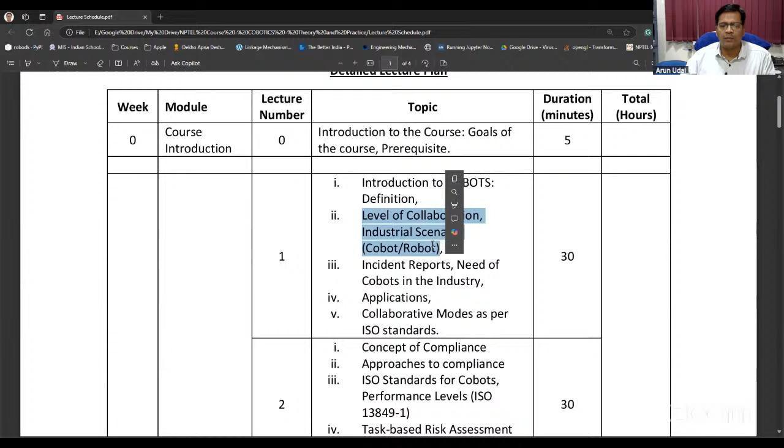So we have covered this. I introduced you to cobots, what exactly they are. You must have found some similarity with the type of robots that you have seen in quite a lot of places. Even humanoids, their arms are like cobots, their legs are cobots, right? So even the legs are arms. In general robots, they are also arms. So they are body appendages.

I showed you quite a few incident reports which stress the need for cobots in the industry, because you saw there are a lot of accidents even in India. I have shared some news reporting from India also. You saw a huge number of applications which normal industrial robots cannot do, which can be done by cobots, especially AI adaptive robots.

Collaborative modes I have explained as per ISO standard, how they look. I discussed quite a lot of industrial standards which should be looked at when you buy or use any cobot especially. There are standards like ISO 9283 which were standard for industrial robots. But when you deal with cobots, there are many other industrial standards which should be considered when you take up any cobot.

Why? Because industry is flooded with cobot markets, and looking at that, quite a lot of fake cobots are also there. So be very careful while you use one of them in your lab, because that makes you potentially very unsafe. Your students may get injured, and it is very dangerous. We are dealing with students, so it is very important to take care of them. If it is a cobot, it has to be a cobot. It cannot be just a claimed cobot.

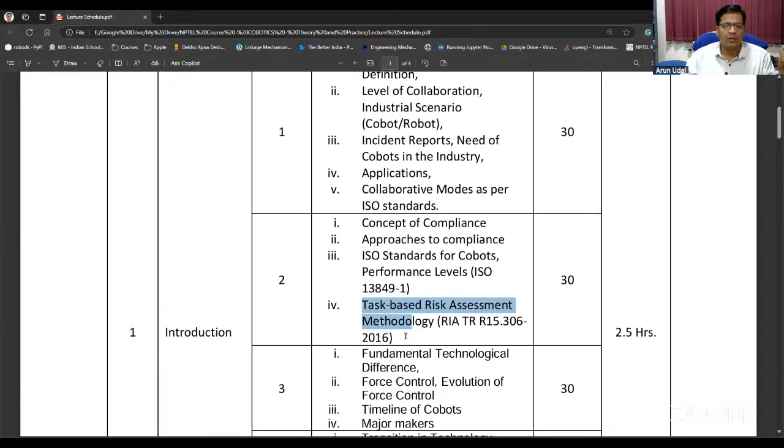I have covered task-based risk assessment methodology in the first week itself. That is how industry people should be aware of how risk assessment is done for any machine in general. But yes, for cobots and robots in place also, you can do it. Okay, standard performance levels. That is, if it is applied with medical or entertainment or any kind of industry, how you should take care. What is the concept of compliance you have discussed?

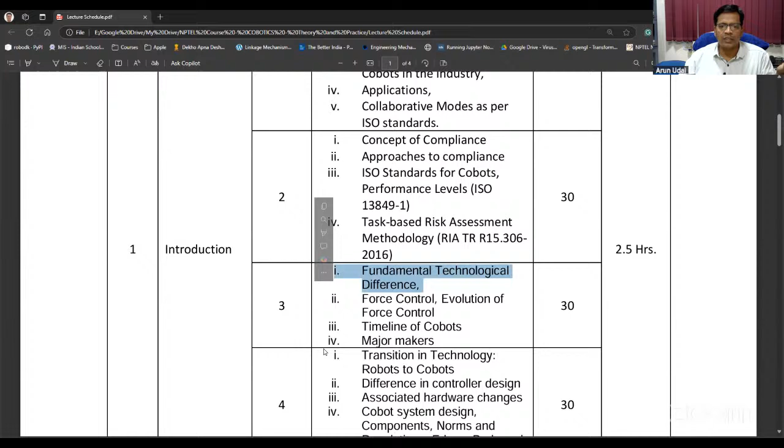Okay, so yes, and fundamental technological difference. What is a robot? What is a cobot? You have appeared for your quiz already, weekly assignments. Hope these are quite okay with you. You have digested well, looking at the performance and all.

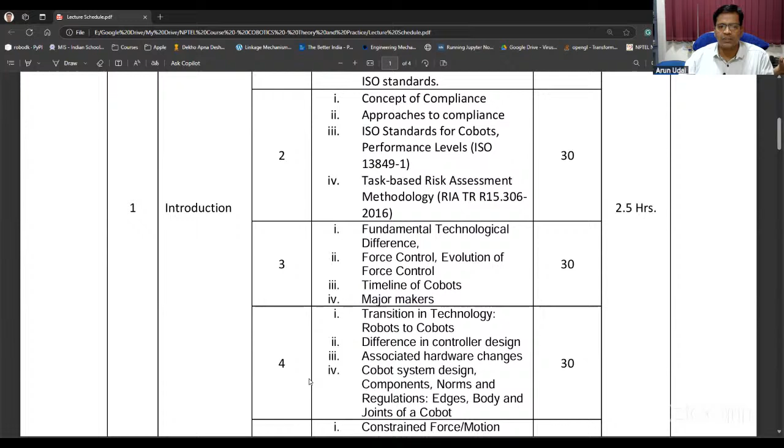Force control, how it has evolved, how we have reached till cobots, who are the major makers. I have discussed on various parameters. So these are few enlightenments which should be there when you deal with cobots. How technology transition has happened, difference between controller design. Controller itself is quite different. Okay, you have to deal with joint torque control. Earlier it was position control. Now you know already. Associated hardware changes, why the cost goes so high.

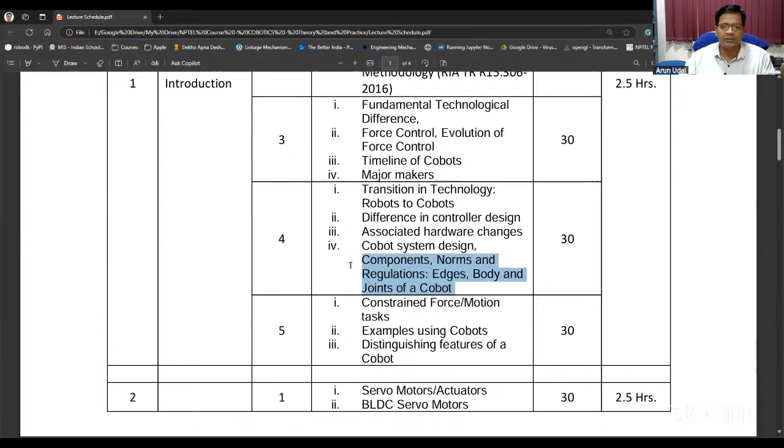Okay, cobot system design, what are the components, edges, body, what are the regulations which are there. So these things were covered in week 1 itself, which has enlightened you to a quite high level that you can at least now distinguish between a cobot and a robot, industrial robot. Constrained force/motion tasks, it is not covered in quite a lot of textbooks also, but I have attempted to cover it to make it very clear how robots should be applied for a particular application.

So this course as a whole is a vision of myself. When I started my PhD in 2010, the cobot already started taking up the place. So 2010 to 2025 now. So many years passed by, and we are still doing too much of fundamentals, and still no courses are there, and very few books are there, and mostly are in research. Not even a single textbook is there. So you see, the course justifies itself by such need.

It was 10 years before me also. Even Oussama Khatib and all, they started almost 20-30 years back, they started publishing in cobots. So you saw through the timeline of cobots, it's a history now, but still it is not very popular. But now it has come up because of its popularity in humanoid robots and quadruped robots at least. Now it is taking up industrial spaces, but there is a lack of literacy, kind of. Not just in India, it is abroad also.

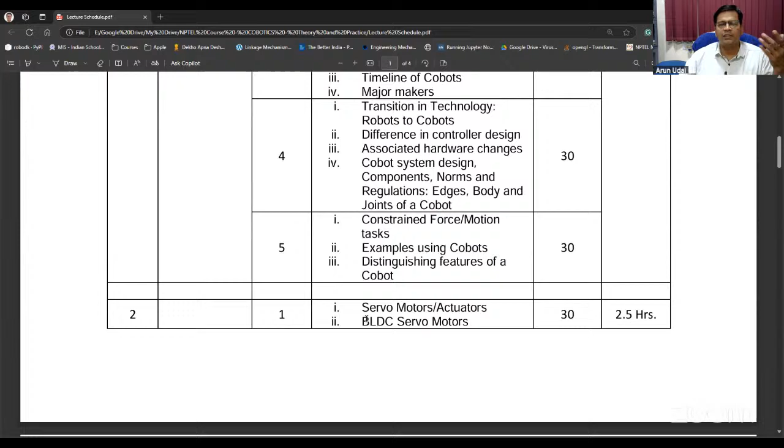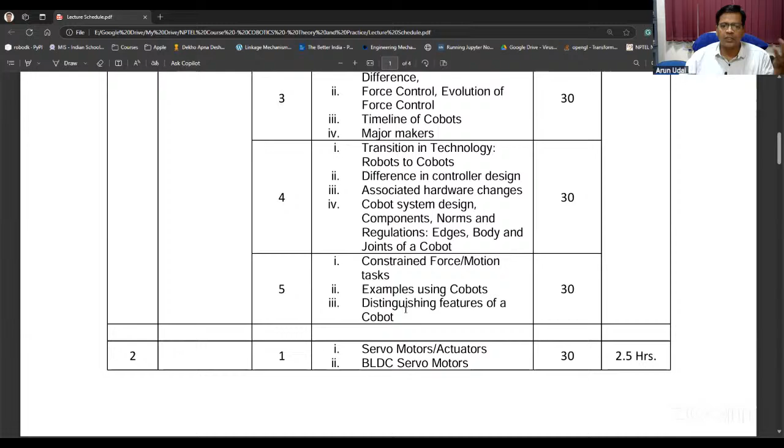Very few institutes are covering this because it is mostly too much of research that went in, which has actually made this standard robot a cobot. So that is the reason it was covered to this detail in the introduction itself. So the introduction itself will make you aware of the importance of this course. Okay, so second week you learnt about actuators.

I have covered actuators even in my other NPTEL course, that is on industrial robots, theories for implementation. That is normally run in the June session of the NPTEL SWAYAM portal. That one was different, and this is a little different in the way I have covered the BLDC motor much more in detail, and the kind of motor drives, especially those which can do torque control. I have covered them in very much detail. Harmonic drives I have covered. That is special to cobots only.

Although quite a lot of contents are overlapping, I have focused more, and also I have exempted a few kinds of actuators which were there in a standard robotics course, like stepper motor or DC motor kind of designs. So that I have excluded here totally, at least the stepper motor. I have covered more in detail the kind of actuators which are there in cobots. So mostly this course is for design of cobots. As an application engineer, you should be aware of what is there in the design of such cobots also.

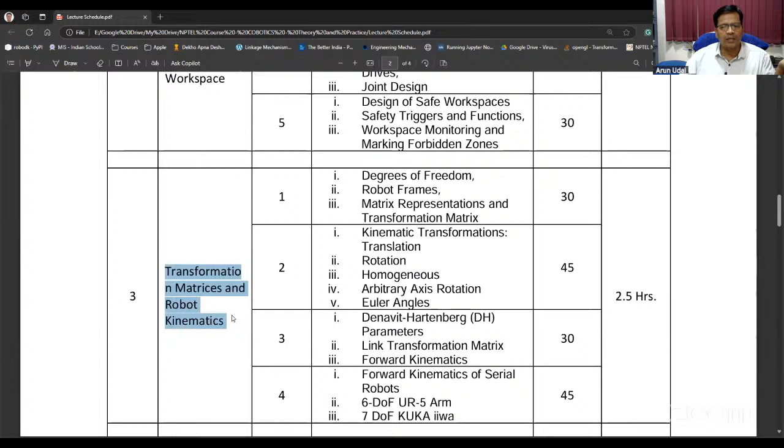Transformation matrices and forward kinematics, it is similar to standard industrial robots, but yes, I have covered forward kinematics of the 7 DOF arm, that is KUKA iiwa, and 6 DOF, which is one of the most popular, the Universal Robots arm.

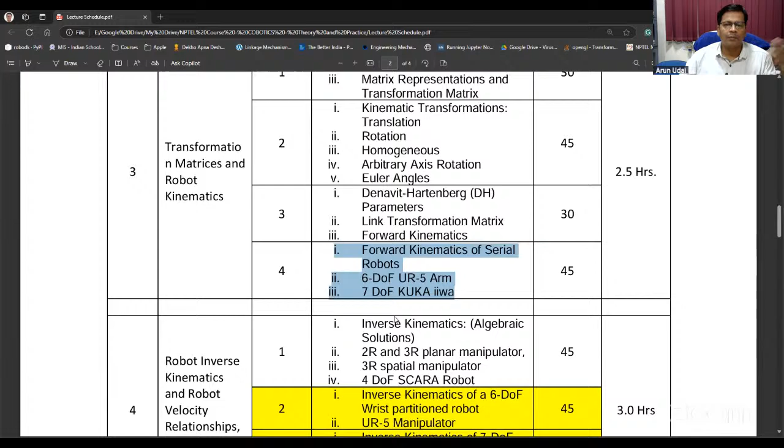So that is what I have covered in this course. So that is forward kinematics. Again, it is a little bit unique as compared to the previous course, but the procedures are all the same. So it must be quite easy going for those who have done a robotics course earlier. I think currently we have just finished inverse kinematics over there in the SWAYAM portal for this course.

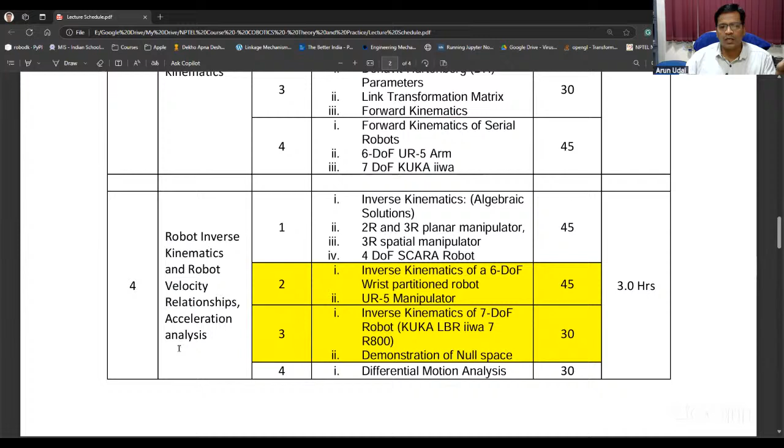Inverse kinematics is very, very trivial as long as it is the fourth week, first lecture that I have covered. After that, I have used the UR5 manipulator, again a very popular robot, for which inverse kinematics was covered in this course. Okay. KUKA LBR iiwa was covered. That's a unique methodology which was covered. Demonstration of null space we have done, which is unique to 7 degree of freedom robots and cobots. So those things are new to this course, which are not there in textbooks also.

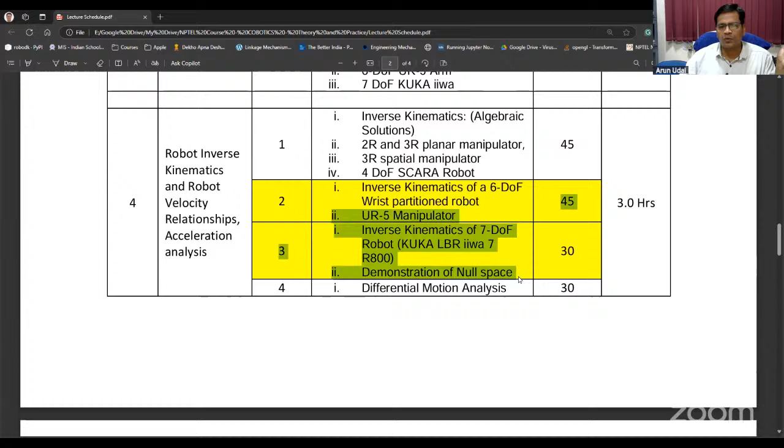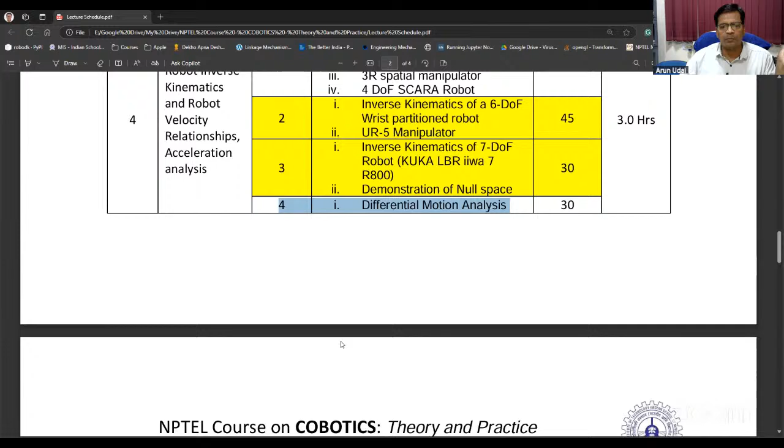Differential motion analysis, that is there, that is common. So those fundamentals will help you to understand week 8, that is force control, that we are going to cover. Okay, so for the remaining things, we will prepare you for the upcoming weeks. Statics, you saw how gravity compensation helps you to create a robot arm which supports lead-through programming. Okay, so those things will be covered. That is the ongoing week.

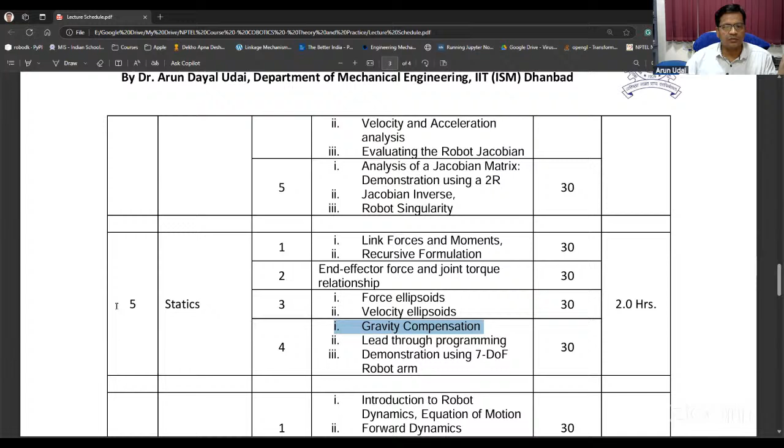This is week 5. Okay, so the remaining few things are very, very common, but yes, you should focus on the force ellipsoid and velocity ellipsoid. This will help you to understand the force and velocity workspaces of a standard robot or a cobot in general. Statics plays a big role in the case of cobots because cobots deal with quasi-static tasks most of the time. So while you do interaction tasks or human collaboration tasks, it remains in this zone only.

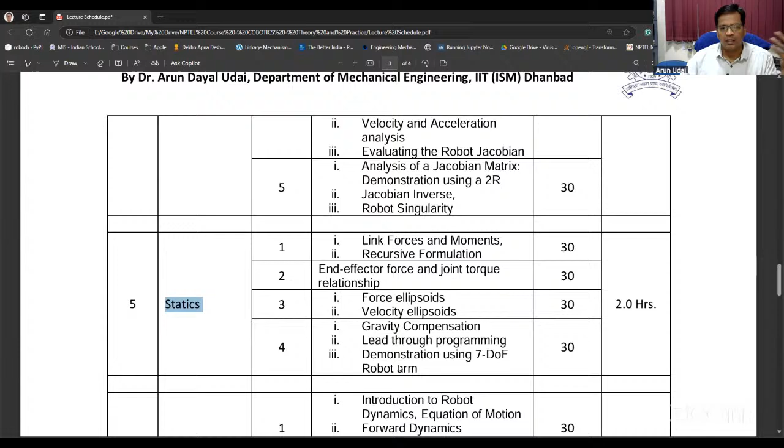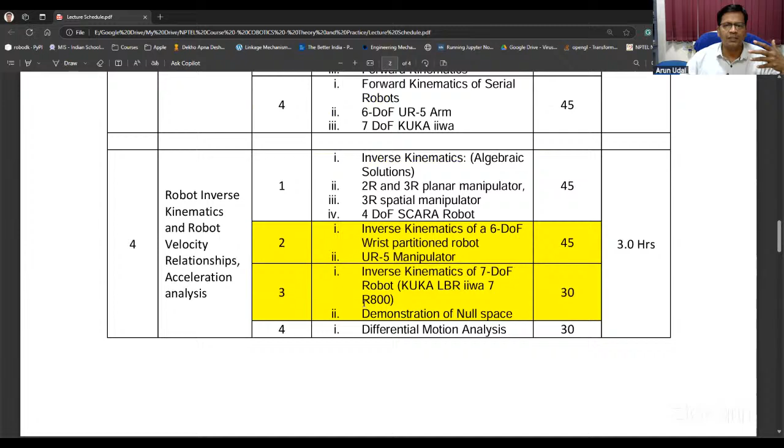So dynamics comes in when the robot moves at a high speed, but at very slow speed, slow interaction, statics plays a vital role. So be very, very focused in this module. So this is my suggestion and my comments on what was covered so far.

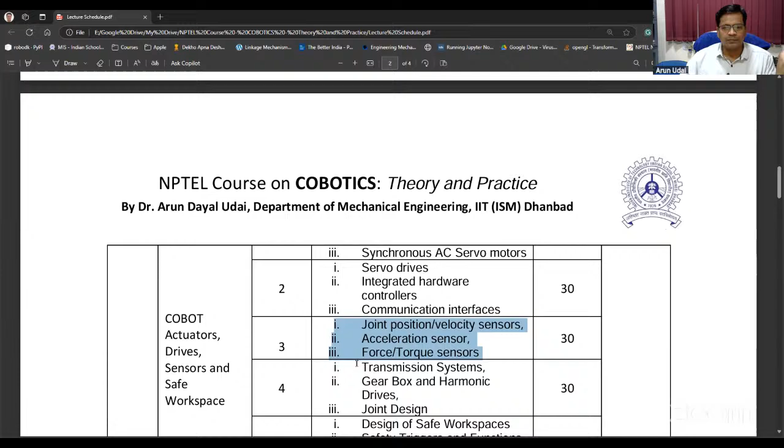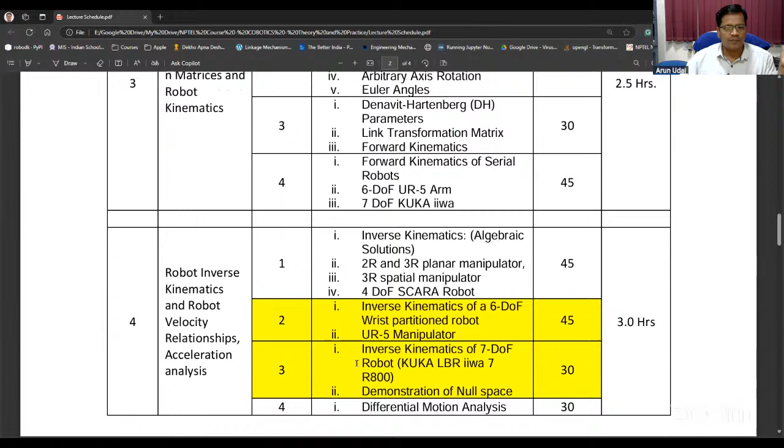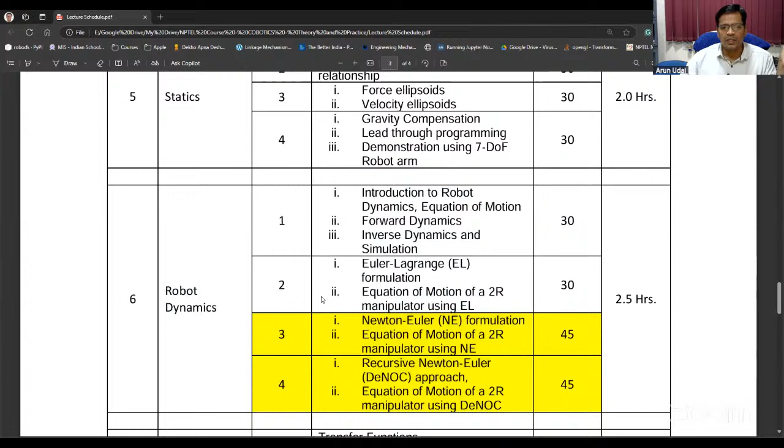Okay, so far this is covered. So the modules which are going to come are week 6, that is dynamics. Again, we have covered quite a lot here. Lagrange-Euler, Newton-Euler, and the recursive formulation for Newton-Euler we have covered. We have exempted DeNOC here, but yes, that will be covered in a later run of this course maybe.

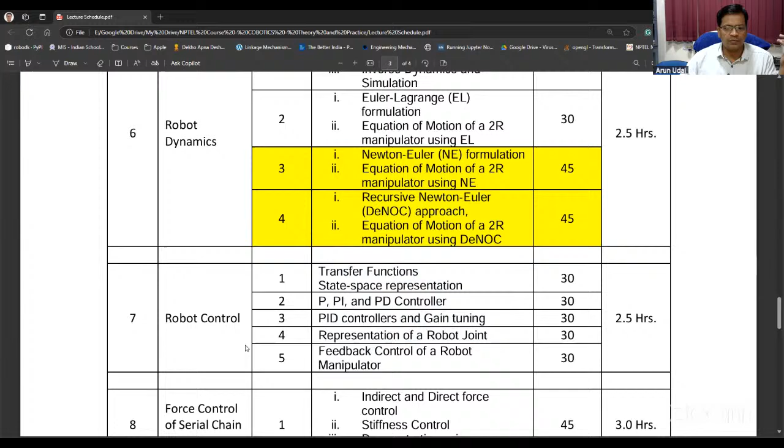Robot control, you focus on this, that will come. Force control is very, very important. That is unique to cobots only. Okay, it is an application of cobots. So that is going to come in week 8. That is unique, and not all parts of it are there in almost all the textbooks on cobots or robots. Okay.